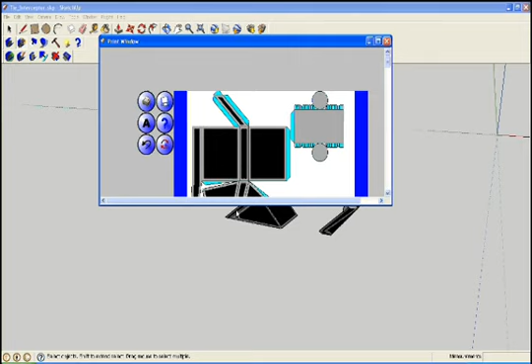Sure enough, there it is. So now I have the print window, which has gone through and automatically unfolded and sent all these pieces here. I have the entire TIE fighter laid out and ready for printing, and that's as simple as that. You hit print and now you have your 5 or 6 pages which have all the cutouts for this model. Very simple, very easy to use.

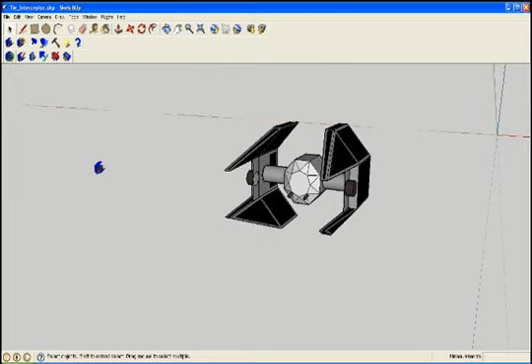The button underneath that is called the Complete Auto Unfold to SketchUp. It basically does the same thing the button above it did, except instead of sending the images to the print window, it just flattens them out and leaves them in SketchUp. The reason this is helpful is some users have found it helpful to export that SketchUp file to a program like AutoCAD, where they can take an AutoCAD version of this exact same file and attach it to a laser cutter and other accessories that AutoCAD has set up on it.

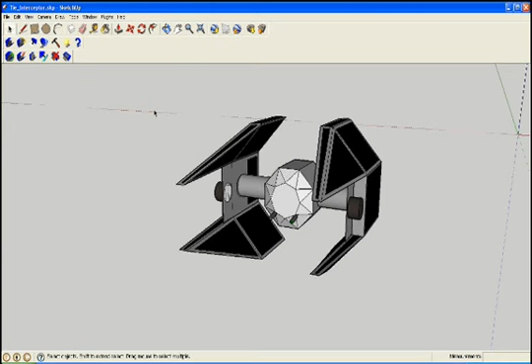So that's that button. Jump back to our guy. There's another real nice button that unfortunately only comes with the education and commercial versions of the software. It's a really handy tool to have, and I'll show you what it is.

It's called the Scale to Paper function. What this does is it takes your model and determines optimally what size it should be to fit on the paper size that you've selected.

Let's click it. It takes a while to run, as long as the Complete Unfold button does. It's stepping through every piece of the model, unfolding it, testing how big it is, then comparing it to your paper size, determining if it rotated a piece what would be the optimal fit, and then it finds whatever the most constraining piece is on this model and resizes it so that it just fits on the paper.

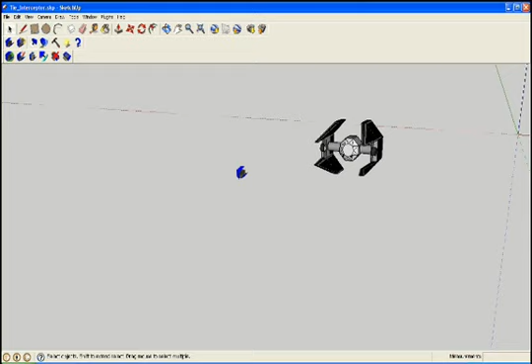So if the model's too small, it'll expand the size of the model. And conversely, if your model is too big, it'll shrink it so that it fits on the paper. The result will always be a model that is optimally going to fit on the paper size that you've selected.

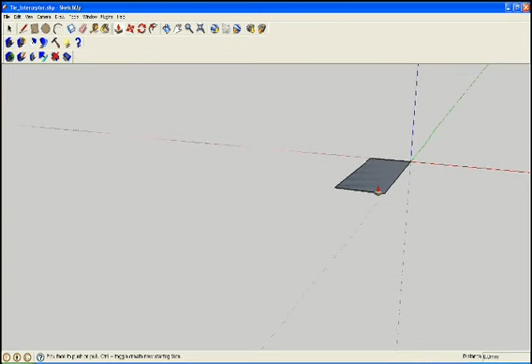So here's our model, and it's been changed. There's a better way to illustrate this. Let's just get rid of this for a second and build a little box, because it'll go a lot faster and you'll see the shrinking in action.

So make that a group. Now let's try to unfold with the unfold test. Okay, sure enough, it's red. It didn't like the unfold, it's too big. So now what we do is say, okay, please scale me to paper.

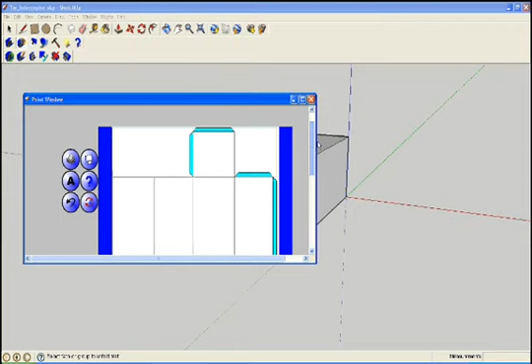So there you can see it shrunk, and I can zoom into it like that. Now when I unfold test, you can see it comes out nicely. If I do the Complete Auto Unfold test, you can see that the piece just barely fits onto the paper. In this case, the width is the constraining dimension. Any wider, and it would not fit on the paper.

So let's get the converse. Let's say it's too small, so we shrink it a bit. Let's run the Complete Auto Unfolder, and you can see the piece is a lot smaller.

Let's say I'm building this model and say, oh, I want this to be as big as possible. So all I do is click on the scale to paper, and then click on the Complete Auto Unfold, and sure enough, now our piece is big enough. So a real nice handy feature to have. Not the end of the world if you don't have it, you can always use the SketchUp scale, but it means a little more trial and error with the print window.

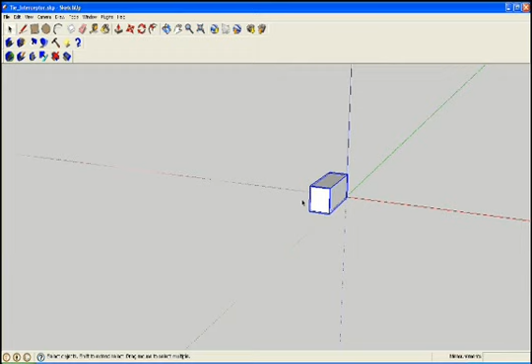So here we are back with our TIE Fighter, just to illustrate the last tools. There's the Toggle Hide button, which is a really handy button. Let's just use it. If we click on Toggle Hide, click on the cockpit, it basically hides everything in the model, doesn't destroy it. And that lets me jump in here and really manipulate the model.